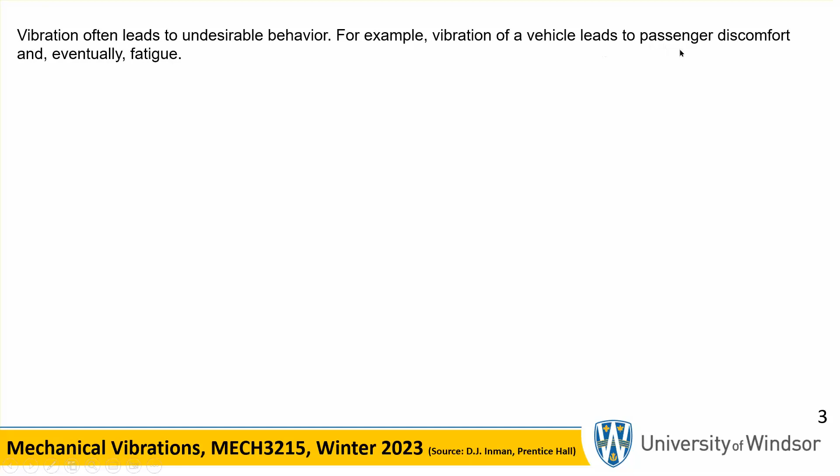But generally speaking, vibration is undesirable. For example, passenger discomfort due to fatigue in a car which is going over a bumpy road.

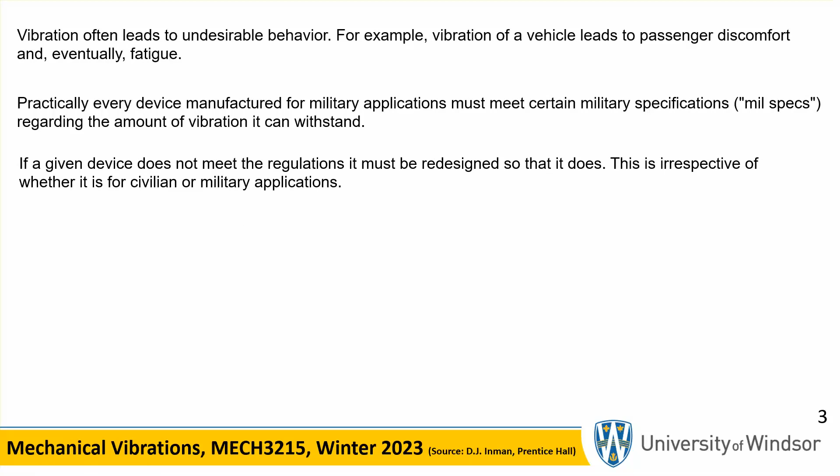Every device used for military applications must meet the mil specs, certain specifications set by the military, regarding the amount of vibration it can withstand. If a device does not meet those specifications, either mil specs or any other standards set by other organizations, it has to be redesigned, irrespective of whether it's for military or civilian applications.

Redesigning, or design in general, is not straightforward or easy, because when you design, there may be many different solutions, and depending on your needs, you have to take the one that meets your needs or is optimal. It does not have a unique solution, and it's an iterative process. This is why designing products is not as easy as it sounds.

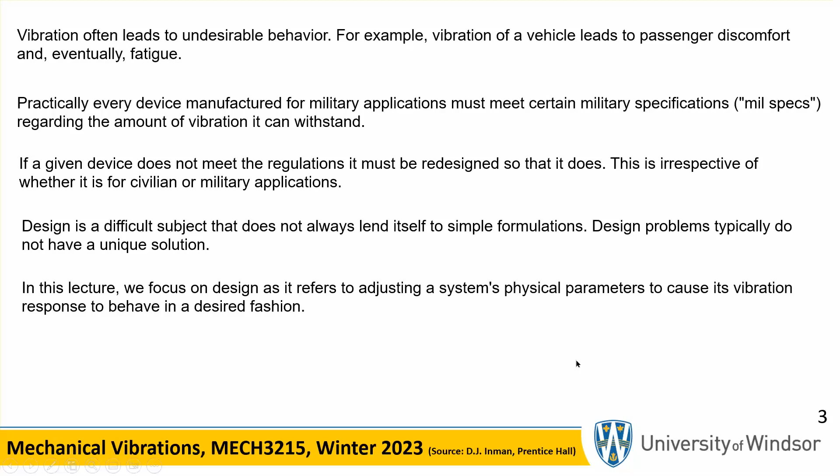In this lecture, we will focus on design when it refers to adjusting system physical parameters to cause its vibration response to behave in a very systematic and desired fashion. You must have a fairly good idea of what is desirable, what criteria your designs need to meet. This brings us to the concept of acceptable levels of vibration.

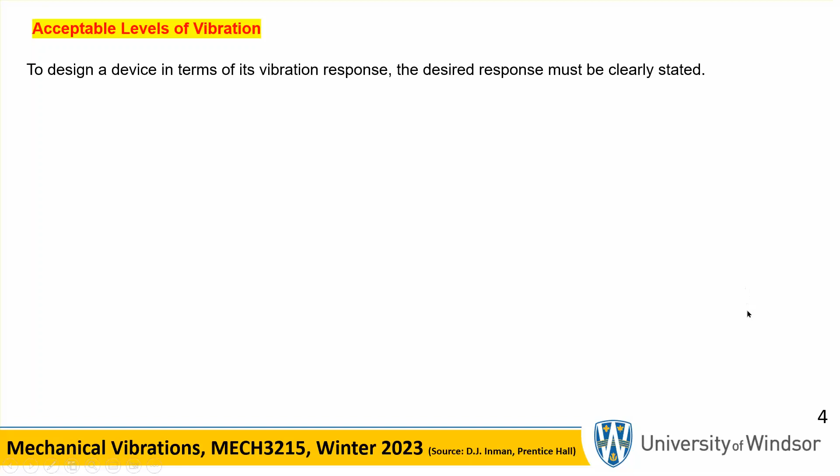To design a device in terms of its vibration response, the response must be clearly stated and defined. It cannot be a wishy-washy statement. You have to, in a very precise way, decide what needs to be achieved.

These are some specs taken from your Inman book. For different systems, the frequency ranges and displacement amplitudes differ. In the case of atomic vibration, in chemistry and material science, the frequency of vibration of atoms is of the order of 10 to the 12 hertz—a huge number. The displacement amplitude, because of the size of the atom, is extremely small, roughly 10 to the minus 7 millimeter.

For human perception, the frequency range is 1 to 8 hertz. We can perceive things as long as it's in that range, and the displacement amplitude is of the order of 10 to the minus 2 millimeters, or 0.01 millimeter, something of that order of magnitude.

For machinery, the frequency range is somewhere between 10 and 100, or 10 and 1000, for example, and the amount of displacement is of the order of millimeter to centimeter. For tall buildings or tall structures, the frequency range is between 1 and 5 hertz, and the amplitude of displacement can go as much as a meter. This gives you a ballpark figure of the range of frequency and displacement during vibration.

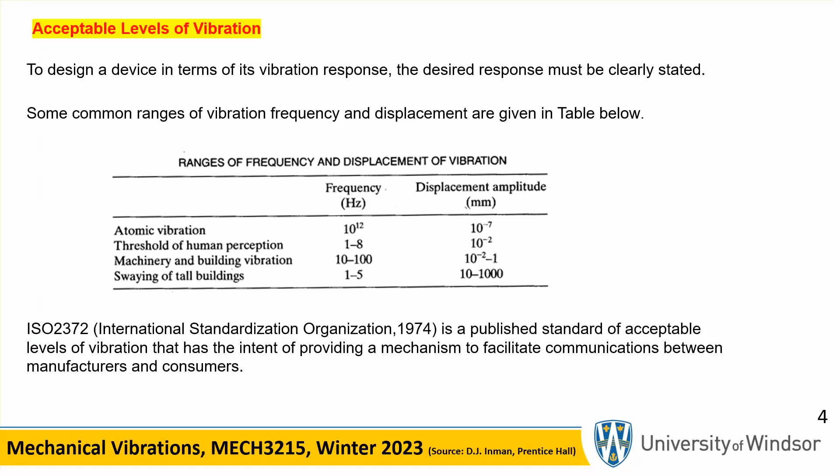Certain standards were set by ISO under the ISO 2372 designation, which we're going to look at in a few minutes. This is intended for facilitating communications between manufacturers and consumers.

Most standards are in terms of RMS values. Of course, things can also be thought of in terms of peak or maximum values, but RMS is very common, and that is what we're going to use in our examples.

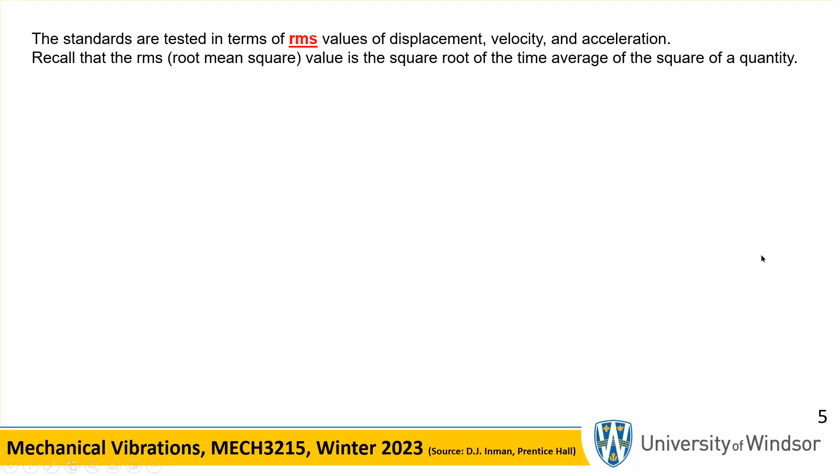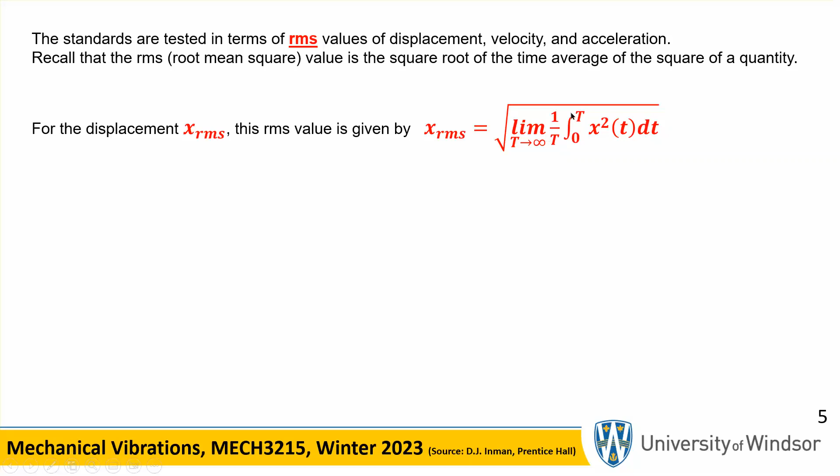Let me remind you what RMS, or X_RMS, means. If you have a signal x(t) which varies with time, and you integrate it from 0 to some big T, then average it out by dividing by T, and take T to be bigger and bigger, assuming this approaches a number, when you take the square root of it, you get X_RMS.

Now, in the case of a special signal, a harmonic signal, this is a very simple expression. You don't have to go from 0 to t as t goes to infinity. All you need to do is integrate it over a single period, where t is the period, then divide it by t, and take its square root.

We'll get that. Now, one of the important tools in vibration analysis is the concept of the nomograph, or what is called in civil engineering a tripartite plot. This is a log-log plot, and it requires some explanation of what exactly it is. First of all, it's a log-log plot. It's for a single degree of freedom and harmonic loading. So just remember, these are the limitations of the nomograph plot.

So we're dealing with a single degree of freedom system which goes through harmonic motion, and it gives you the RMS values of displacement, velocity, and acceleration as a function of frequency. Once you have one of these, you have the other two. Once you have, for example, displacement, you have velocity and acceleration. Or when you have velocity, you have the other two, displacement and acceleration.

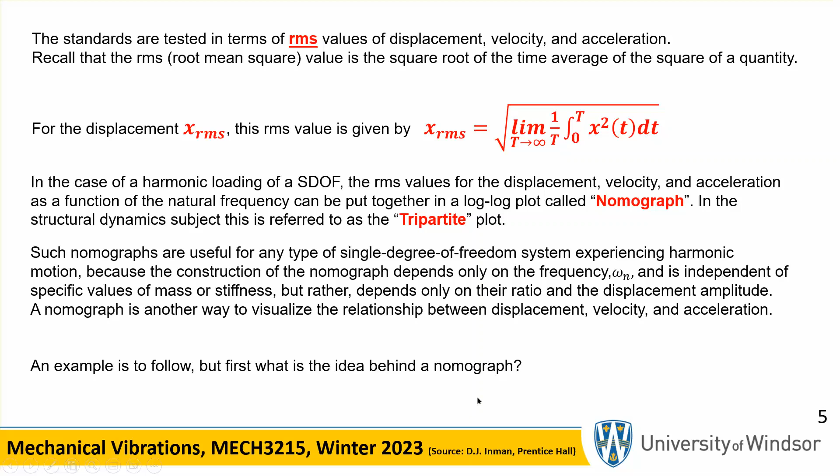So let's move on. We will see this, but it requires an explanation. It's not that straightforward, like saying here's the plot, and that's what I'm going to be doing. So what is the idea behind the nomograph?

So if you have a harmonic signal, a sinusoidal signal with frequency omega n and amplitude x, basically we have a statement on the top. That's how x is going to change with time. Now, the peak amplitude is big X.

The RMS amplitude is 0.707x. If you do that integration over one period and work it out, you see that you get 0.707x. The velocity, in other words, if I differentiate it and use that formula, you see that you get VRMS, which is the thing up there multiplied by omega n.

That doesn't surprise you, because if I was talking about peak x, x max, that'll be big X. If I differentiate this and talk about peak velocity, because when you differentiate sine you get omega n in front, it's going to be omega n times x, okay? However, we're not talking about peak value, we're talking about RMS. So whatever x RMS is, you multiply it by omega n, you get the RMS velocity.

And one more time, you differentiate this again, you get another omega n. So RMS acceleration is the velocity RMS times omega n. Or in terms of XRMS, that'll be XRMS times omega n squared. Okay, so these are obvious things.

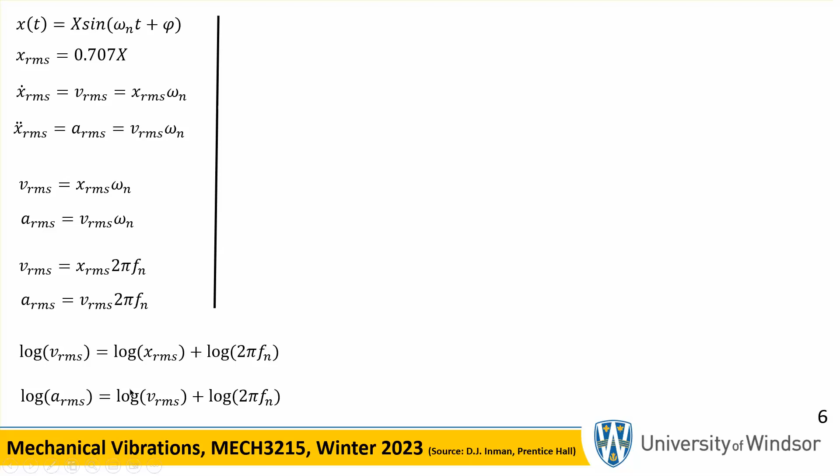Now, if I take these last two equations and take log of both sides, log of v is equal to log of x plus log of 2 pi fn. And the same thing with the second one, log of acceleration equal to log of vrms plus log of 2 pi fn. This is the property of logarithm.

And if I rearrange these, for the first equation, I just wrote it up here. The second equation, I took log v to the left side and log to the right side. I'm sorry, I took log of 2 pi fn to the left side. So there will be a coefficient of minus. Hang in there, this...

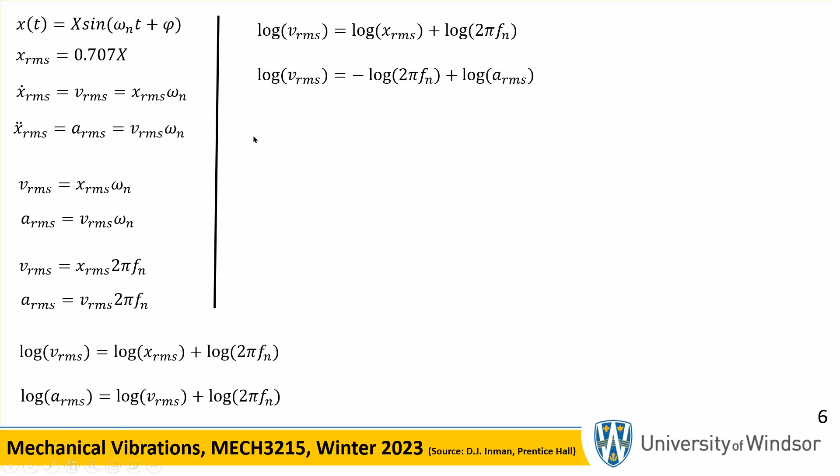Yeah, that's good, that's very good, that's exactly what I want. So I've taken this log to the left side. So we have log of v equal to negative log of 2 pi fn plus, of course, log of aRMS.

Now, if you look at this top equation, the very top equation, if you gave me xRMS, I know the first term here.

If you specified what xRMS is as a number, I know what this thing is. If I look at log of v versus log of fn, or 2 pi fn, this is a linear function. So log of v equals 1 times log of 2 pi fn plus a constant. In other words, log vrms varies linearly with log of frequency, with a slope of +1. If you gave me xRMS as a constant number and I plotted log of v versus log of fn, I left out the 2 pi because it doesn't do anything basically. You get a straight line with a slope of +1.

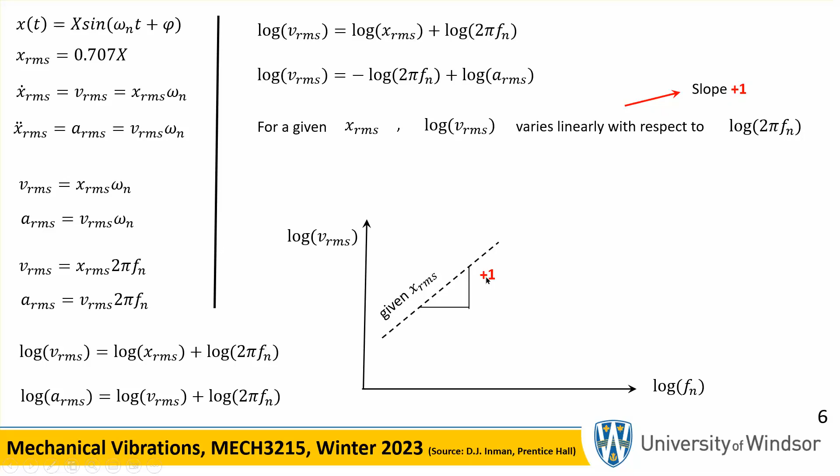And if I look at the second equation, log of velocity equals minus log of the frequency plus a constant. If you give me ARMS, the acceleration, I can say log of v equals negative log of fn plus a constant. In other words, it's a line with a slope of -1.

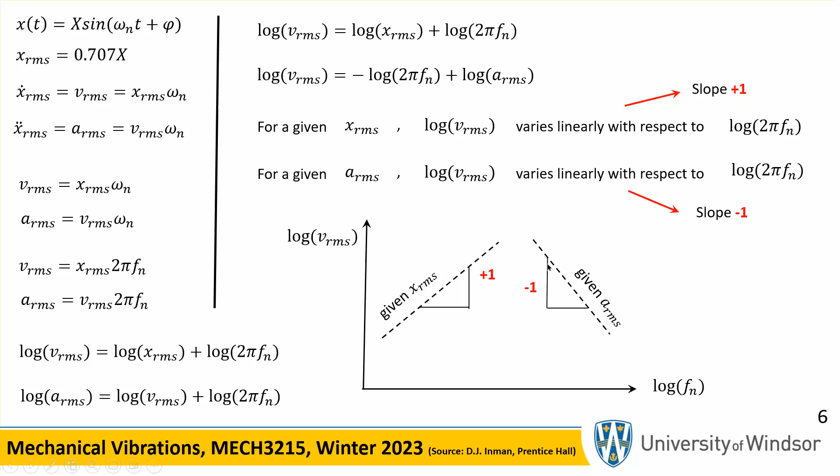So this is the idea behind that nomograph plot, and we'll see that in a minute. For a given XRMS, for a given amplitude, the variation of log of v versus log of fn is going to be a straight line at angle 45 degrees. And for a given acceleration, the plot of log of v versus log of fn is a straight line with a slope of -1. Okay, so here is a typical nomograph plot.

Remember that this horizontal axis is logarithm of fn, so it's a log plot, a logarithmic axis for frequency. This is the logarithmic axis for velocity, vrms. So log of v versus log of fn.

Notice that if you fixed a displacement, these are different levels of displacement. If you fixed one, the variation of log of v versus log of frequency is just a straight line.

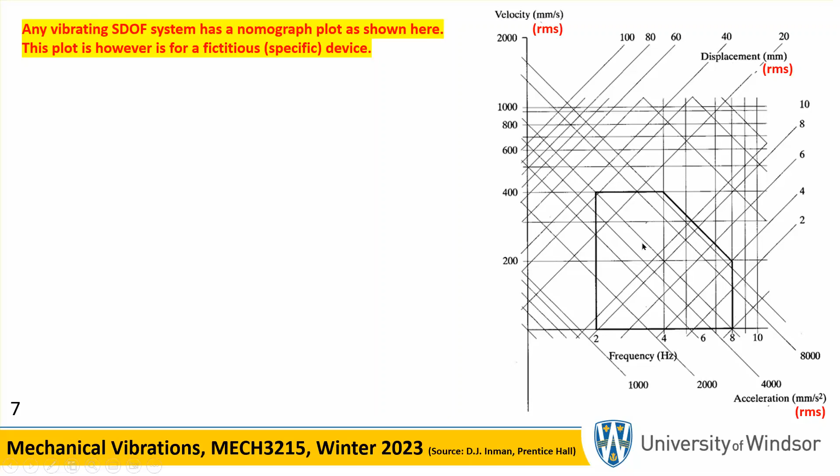These are the accelerations: 1,000, 2,000, 4,000, 8,000, etc., millimeter per second squared. If you fixed one acceleration, the variation of log of v versus log of fn is a straight line with a slope of -1. That's exactly what this thing is saying. I'm using RMS here, but as I said, everything can be in terms of peaks, for example.

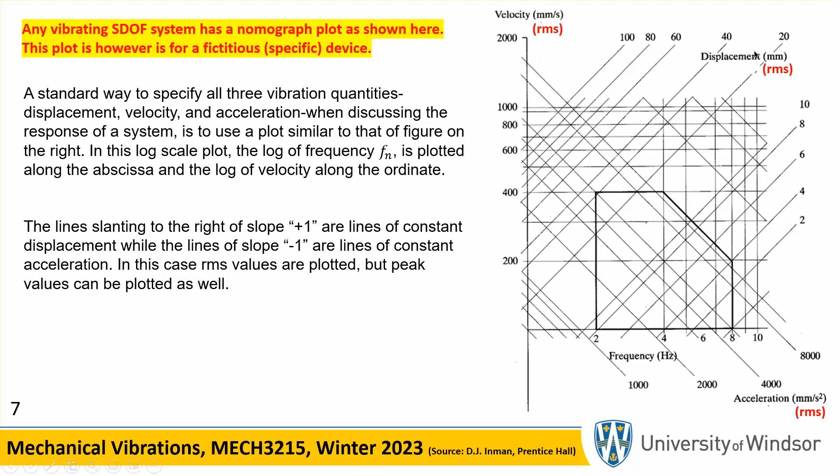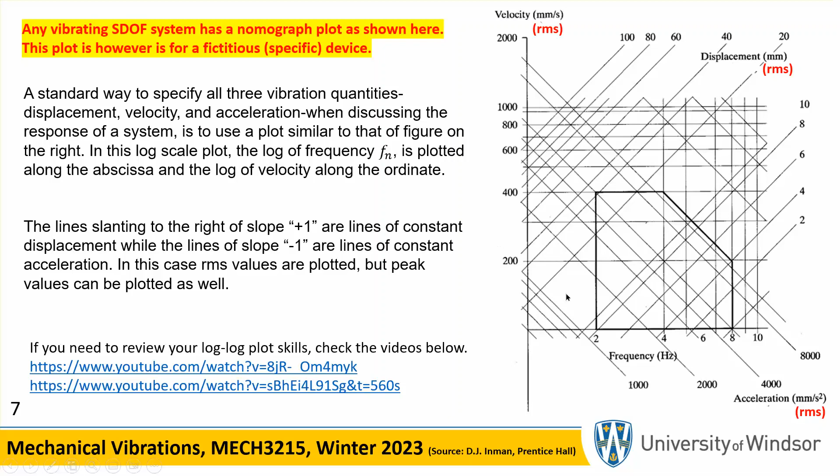Now, you may feel there is a need to review your log plots or semi-log plots. I suggest you go to a very basic tutorial. These two are pretty good, and you can review it. For us, it's just going to be eyeballing — we'll eyeball it and come up with the numbers, but there's a systematic way, and if you want, you can go to these sites.

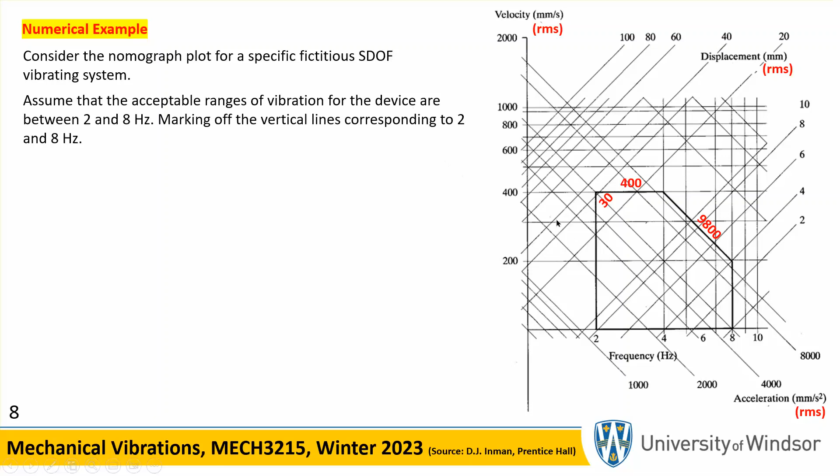Now let's look at a simple example. It says assume that an acceptable range of vibration for a device is between 2 and 8 hertz. So we know this is the line 2 hertz, this is the line 8 hertz. We know that an acceptable level of vibration for a certain device is in this range.

If the RMS desired acceleration is 9,800 millimeter per second squared in that frequency range, it means the acceleration must be below that. So look at the line — these with a slope of -1 are logs of acceleration. Find the line which corresponds to 9,800. Anything below this, to the left of it, is acceptable. So right now we are between 2 and 8 and below 9,800 millimeter per second squared.

And the RMS acceptable for velocity is 400 millimeter per second. So this horizontal line, this is 400, it limits the velocity. So you must be below 400, to the left of 9,800, and between these two vertical lines. So this is an acceptable region for that device, based on the specifications given.

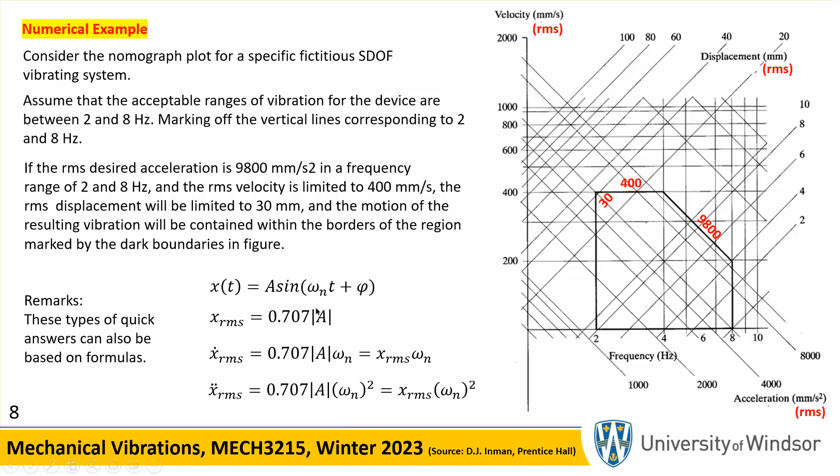Now, I wrote these things down for your reference again. We already saw that, but there I used the big X here — big X, I'm putting the A, so it doesn't matter. You have seen it already.

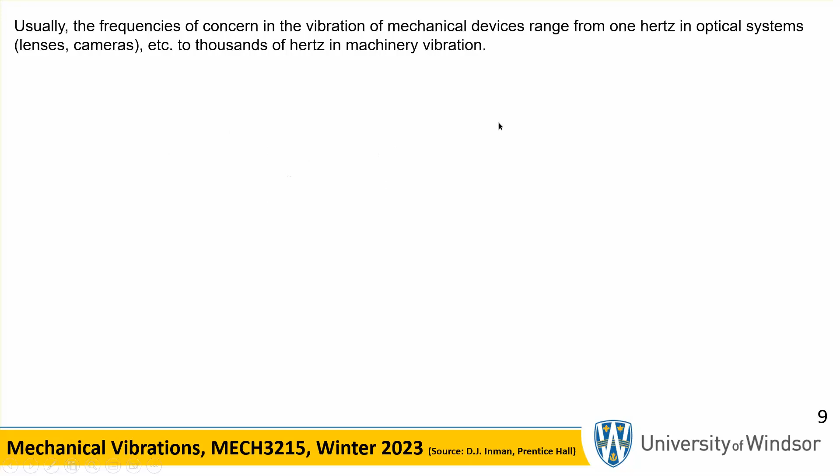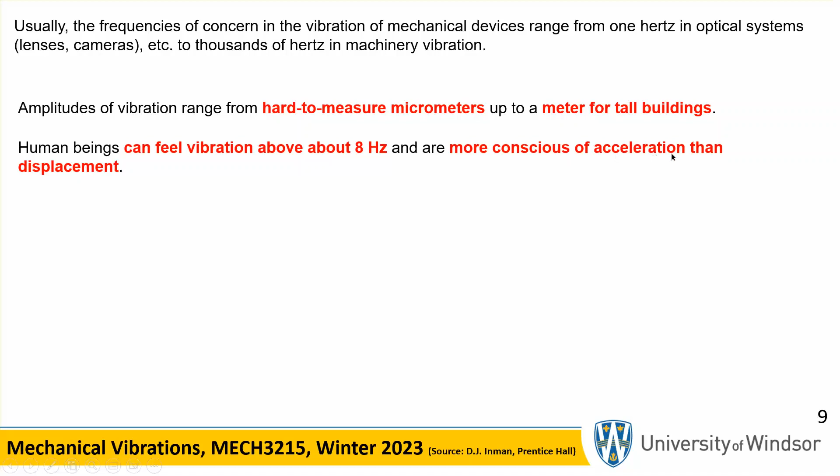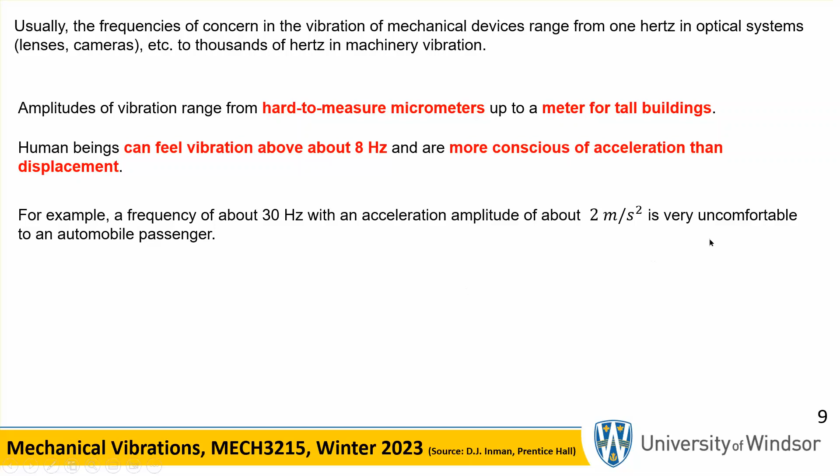We are more concerned, or more conscious of the acceleration rather than the displacement. That's the reason why a 30 hertz oscillation in a car traveling at that acceleration is actually uncomfortable. It's outside of that frequency range, and this may be okay, but outside of that frequency range at this acceleration, you may feel uncomfortable in the long term.

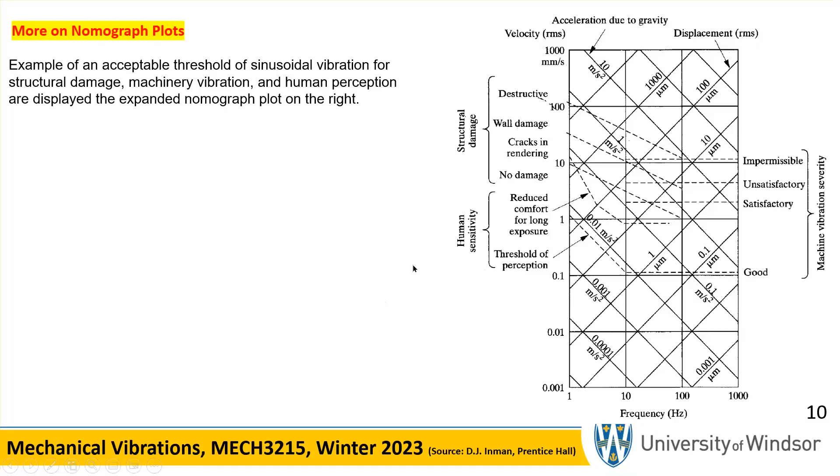So here is the same nomograph that I showed you before, except that the standards set by ISO are set here. These are the 45-degree lines; we show the displacement. These are the minus 45-degree lines, which are the acceleration. The vertical axis is the logarithm of velocity, and the horizontal axis is the logarithm of frequency. Remember, all of these are log-log plots.

Now, if you look at the ISO 2372 standard for machinery, it says that the frequency range is between 10 and 1,000. And if your velocity is between this value and this value, you're dealing with a good characteristic of the vibration of the machine. If you are between these two lines, it's satisfactory. If the velocity is between these two lines, it's unsatisfactory, and above that, it's just impermissible.

It's destructive, basically. Now, the other standard is for tall buildings, which is right here - this is ISO DP 4866. So basically, it says that if you are below this line, there's no damage to the vibration. Between these two lines, cracks in the wall appear, and between these two lines, there's a problem with wall damage, and finally, above that line is completely destructive.

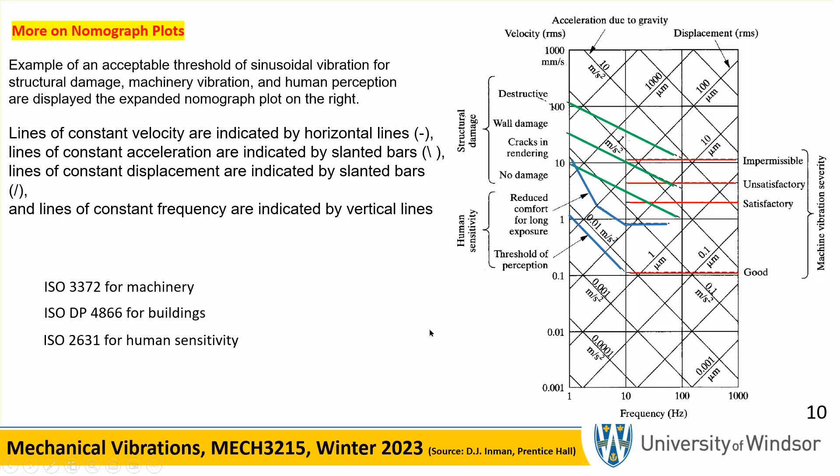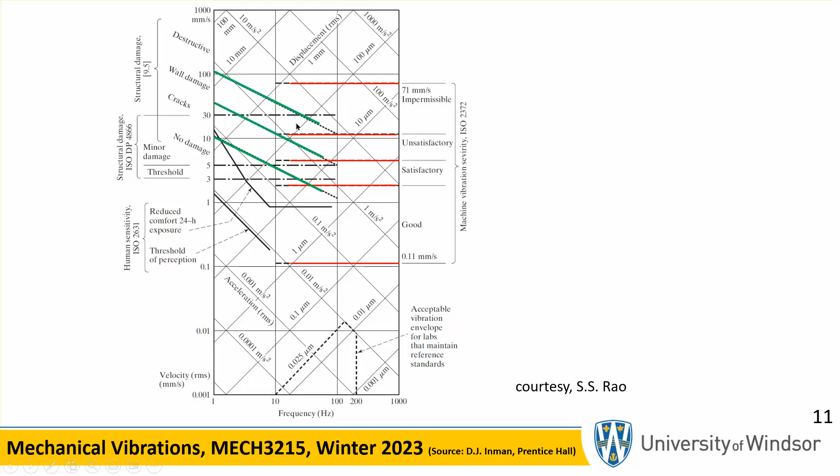Now, this same plot is reproduced here for you. The sources are different - the previous one was from Inman's book, this is from Rao's book. So it's the same kind of stuff. You can see there is the ISO 2372 standard for machinery, there is the ISO standard 4866 for buildings, right there. And finally, these two lines are for human sensitivity to vibration. So this is for machinery, that is for structures, and this is for human perception.

So let's do an example. Suppose we have a car whose mass is 1,000 kilogram and stiffness of the suspension is 400,000 Newton per meter. Now it hits a bump of 0.1 millimeter. Let's assume that this is actually the RMS amplitude - it could be the peak amplitude, but we're saying suppose it's the RMS value of displacement. So, of course, once it hits the bump, the car goes over it and starts vibrating up and down.

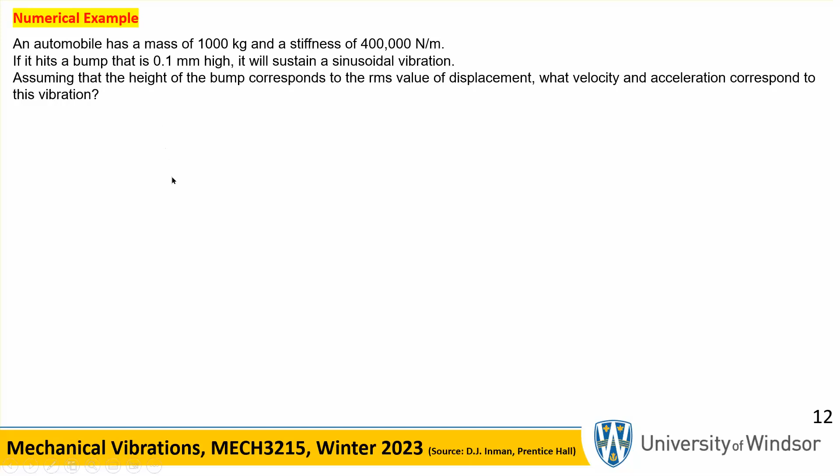It asks what velocity and acceleration corresponds to this vibration. In other words, if this is the RMS displacement, what are the RMS values for velocity and acceleration? And then the second question is, what can we do so that things get better - basically, we don't even feel the hitting of the bump and that vibration. So I'm going to do it on the next slide.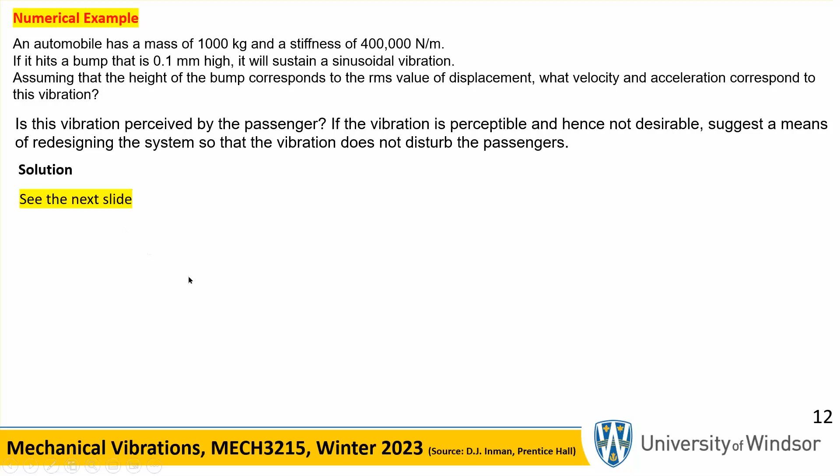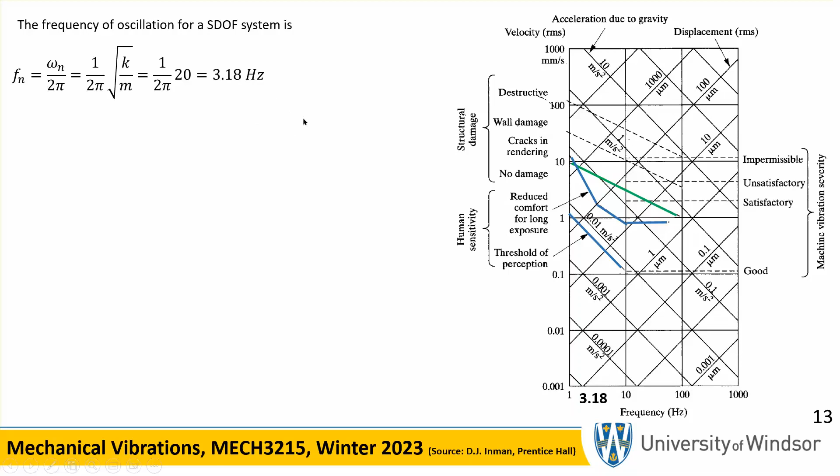Now, the RMS displacement amplitude is 0.1 millimeter, which if you convert into meters and write in terms of micrometers, it's going to be 100 micrometers. So what happens is that here is the 3.18 hertz - that's this number.

You go up, up, up until you hit that curve, given displacement. We are given the displacement of 0.1 millimeter RMS, or 100 micrometers. So that's this line, see that? This line, 100 micrometer, hits that line at this location, and this location falls actually in that range, between these two curves. So yes, it's perceivable, but in the long run it could be fatiguing.

Okay, now all of these can be found from the formulas I gave you before. If this is the RMS value multiplied by omega n, you get 2 millimeters per second. That's going to be the value of the velocity. If you go horizontally, you should be hitting 2, and it hits the line at 45 degrees, sits on that line at 45 degrees, which is this acceleration. This line, the line at 45 degrees with a negative slope, is going to be corresponding to acceleration of 0.04 meter per second squared.

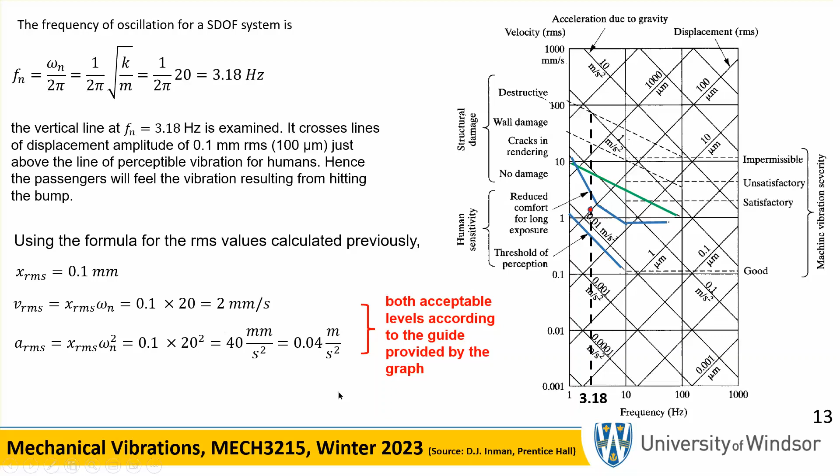But the bottom line is that you are between these two, and therefore it's reasonable, no problem. Both are within acceptable levels. Now the question becomes, what if we try to move this point of intersection to the left?

How do we move it to the left? That actually the passenger, it falls either on the line or below that blue line here. How do we do that? Because then the passenger does not even perceive, does not even feel the vibration. Okay, so there's two ways of doing it.

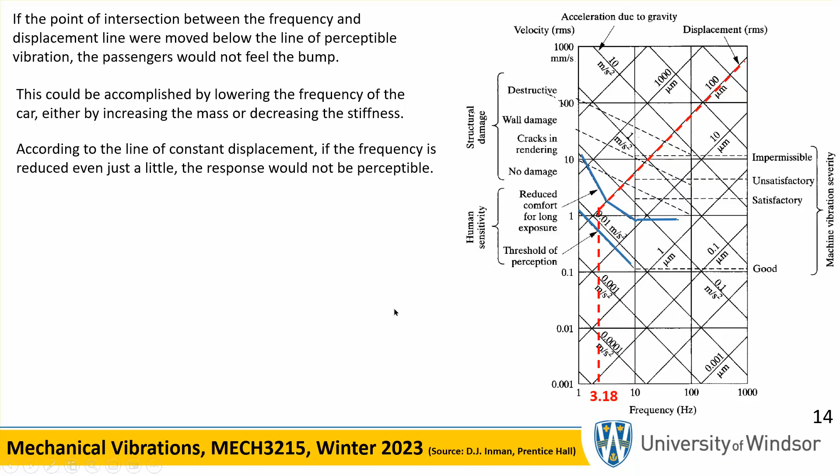Obviously you have to move this line to the left by some amount, and that can be done by changing the natural frequency. For example, I can do it by increasing the mass, because remember, natural frequency is square root of k over m. If I make m bigger, frequency becomes lower, it goes to the left. Or if I make k smaller, the frequency, same thing, shifts to the left.

So why don't we try to move it to the line at 3 hertz, right there, okay? So we want to make natural frequency 3 hertz, in other words right there at this location. So how can we do this? Well, remember that the frequency is given by this expression, okay?

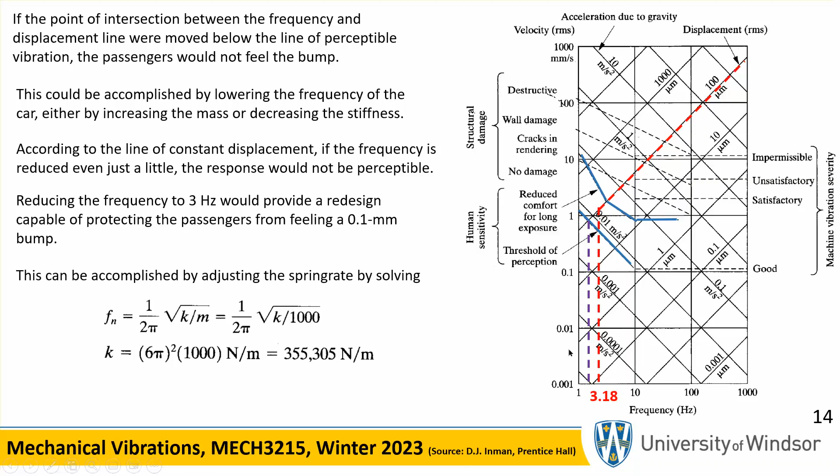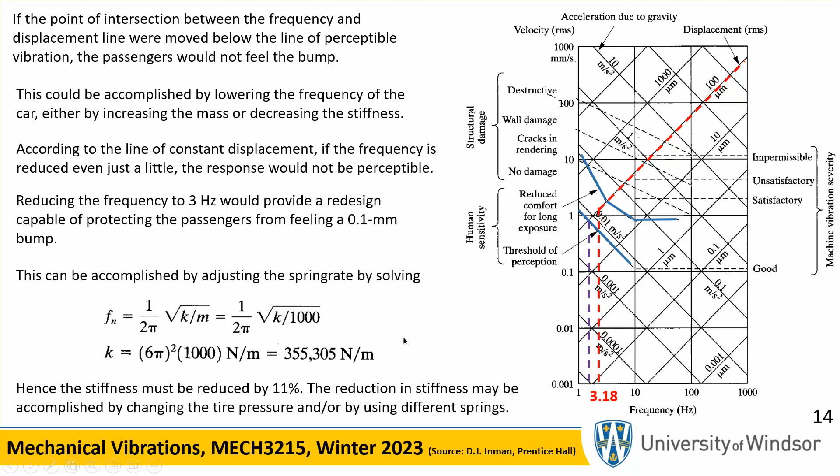Now, if the mass is fixed, and we can change the suspension stiffness, and if we want this thing to be 3, as we want it here, this is intended to be 3, that purple one, then you work it out, you get k equal to this. And so by reducing the stiffness by 11%, you come up with a benefit that once the car hits that bump, the passenger will not even perceive the oscillation.

Now the problem is that there are some issues that are overly simplistic. We made the problem overly simplistic here. For example, we assume a single degree of freedom system. A car is not a single degree of freedom system, or if you use a more refined model, such as a multi-degree of freedom system, you have more confidence.

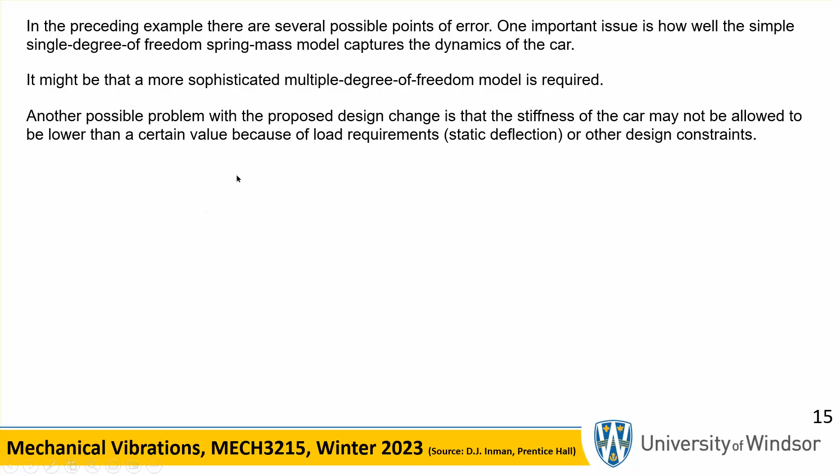The second one is that we reduce the stiffness, okay, and that was beneficial for the sensation of vibration by the passenger. But if you reduce it, if you make it out of gum, okay, then obviously it can't support its own static deflection or the weight of the car. Or you may decide to increase the mass, but that may not be possible because more mass means more fuel, etc. So that may not be feasible.

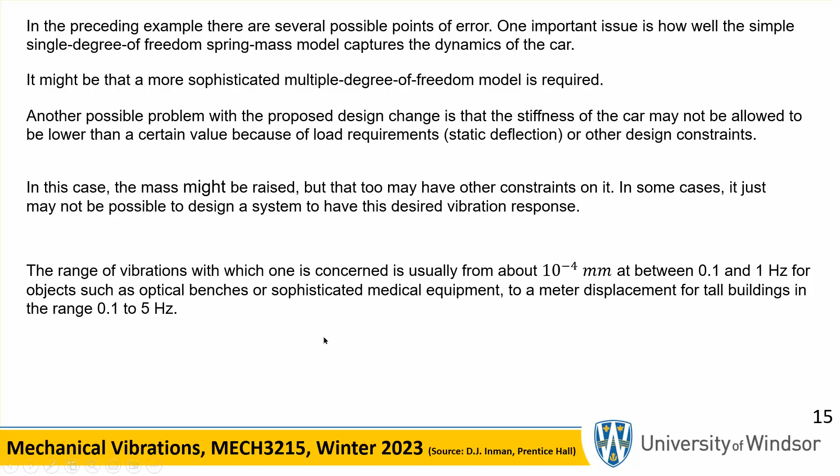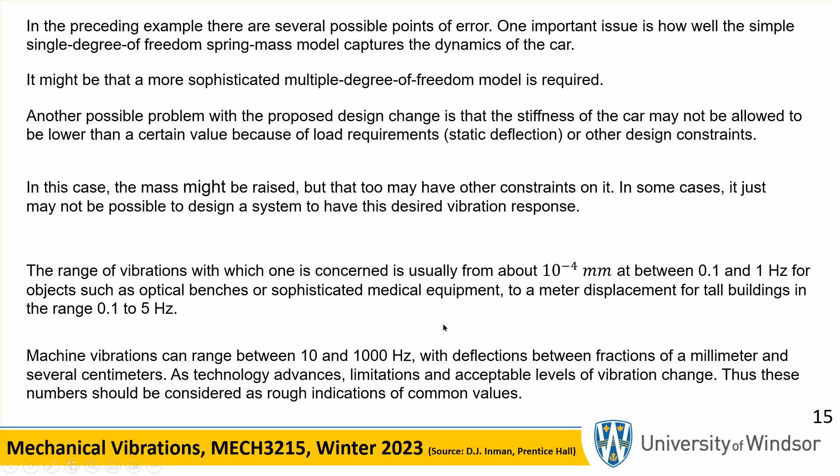Now these are the range of oscillations for the range of frequencies, and the displacement amplitude for different situations. This one is for sophisticated medical equipment. For a tall building, the range of frequency is 0.1 to 5 hertz, and the range of displacement amplitude is about 1 meter, could be as order of magnitude being 1 meter or even more. And machines go between 10 and 1000 hertz, and roughly a fraction of a millimeter to a centimeter, several centimeters, for the displacement amplitude.

Okay, now what's this business of vibration isolation? So first we covered the issue of a nomograph and using these charts to come up with a very rough, quick, acceptable, perhaps, solution based on the standards set by ISO.

Now there are different ways of controlling the vibration. One of them is to actually stop it at the source. In other words, by changing the mass or the stiffness of the structure, we change the natural frequency, and therefore, like the previous case, we moved that vertical line from 3.18 to the left.

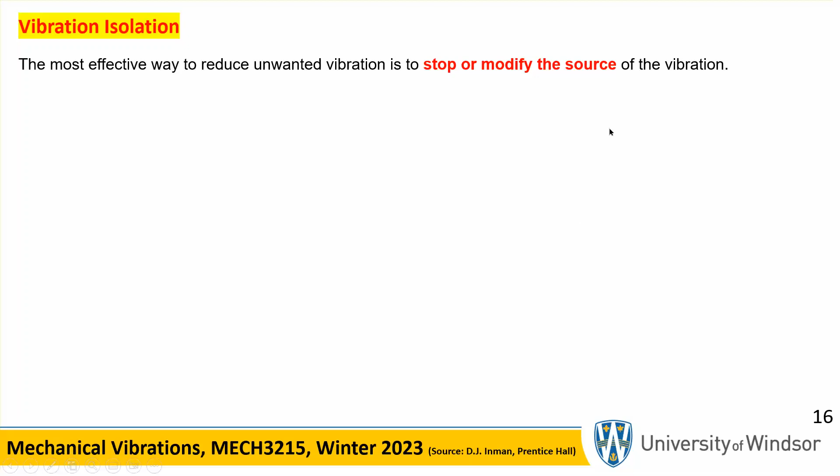Okay, so that is trying to stop it at the source. But it may be that that can't be done, like in the previous example, because the thing is already manufactured. You cannot do anything about it.

The other option is to isolate the source, usually done by changing the stiffness and damping characteristics between the machine and the ground. You put rubber pads there, or a spring, and that's one way of controlling it by isolating the machine, the source of vibration, from the foundation or ground.

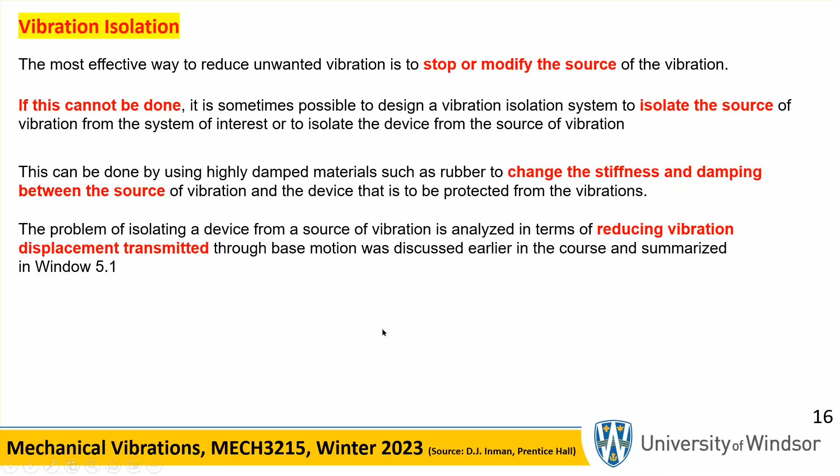This can be done both in terms of displacement transmissibility and force transmissibility. When you put these isolations in place, you either reduce the force through the foundation, or in the case of base excitation, such as a car going over a rough road, you're trying to reduce the displacement transmissibility. So it can be done either at the displacement level or the force transmissibility level.

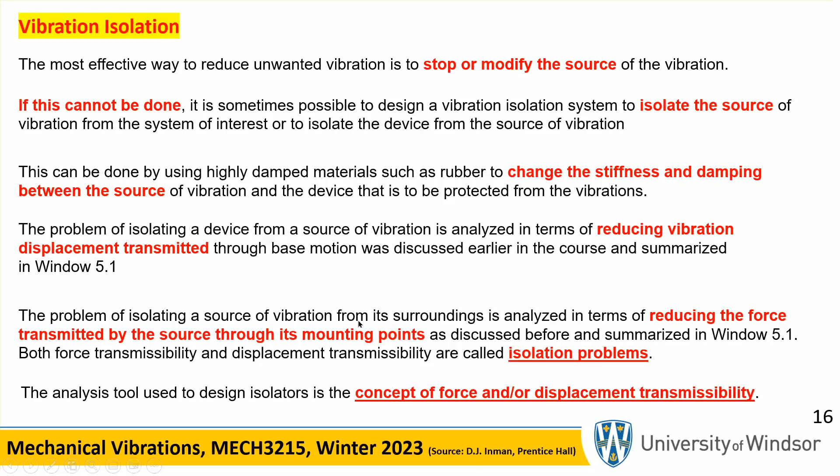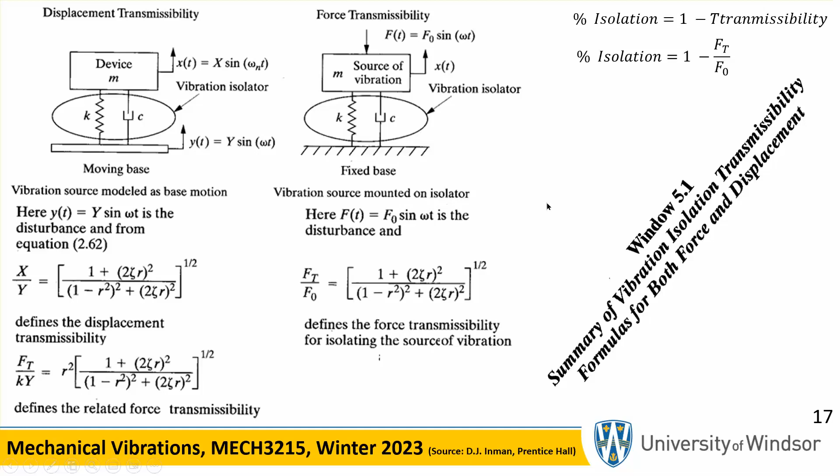We have done things like this in the first, I would say, weeks 3 to 6, something like that. We have done force transmissibility and displacement transmissibility, etc. Now, the alternative is to do a vibration absorber.

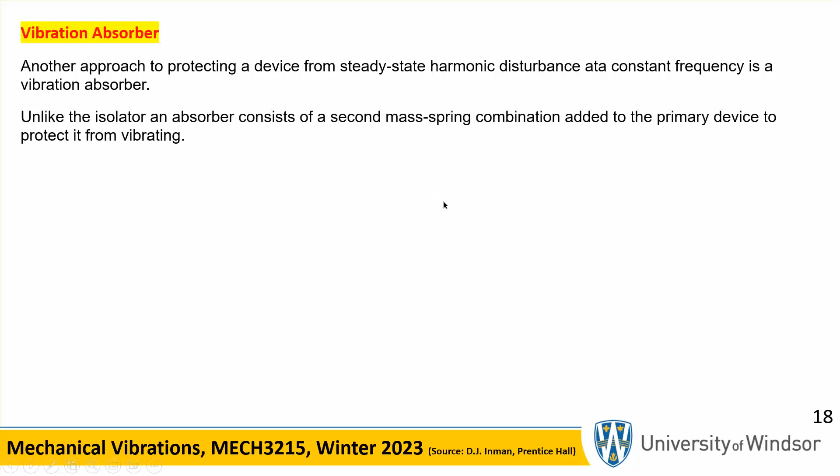This is another approach to protecting a device from steady state harmonic disturbance at a constant frequency - this is vibration absorber. Now, the difference here is that you add things to the machine. You don't introduce rubber pads and springs, but instead alter the machine somehow so that it solves the problem, alleviates the problem.

If you do this to analyze it, we may be going from a single degree of freedom into a 2 degree of freedom system, which has two natural frequencies, and obviously you have to stay away from them. We'll discuss this in the context of examples in a minute.

The whole idea is to take the machine, add to it a mass, which is connected to the original machine through a spring with some stiffness. Instead of the machine vibrating violently or largely, the machine's vibration itself is reduced or completely eliminated, but at the cost of that added mass violently vibrating.

Absorbers are often used on machines that run at constant speed, such as sanders, compactors, reciprocating tools, and electric razors.

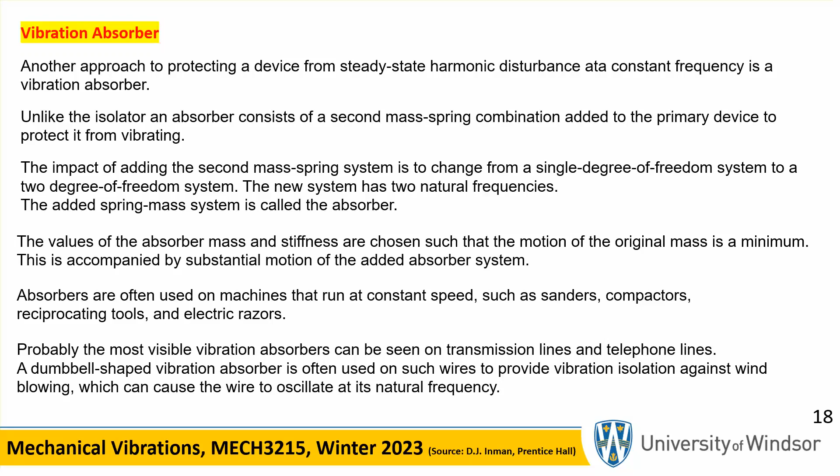The other example I gave you is that skyscraper in Taipei, where on the top 5 or 6 floors they have a gigantic ball hanging from the top. So if there's any tendency of the building to sway and vibrate, that huge steel ball on the top floor prevents that by vibrating and absorbing the potential vibration of the building itself.

So here's the situation. We have a machine here, it's got legs, and because of the nature of it - it could be an out of balance machine turning - the actual platform vibrates violently. So what you do is you add a mass connected to the machine through a spring, and now instead of a single degree of freedom model, we have a 2 degree of freedom model.

I will show you that if this mass and spring stiffness, MA and KA, are chosen carefully, then the displacement, the amplitude of M, becomes zero. But this added mass starts vibrating. We'll see that.

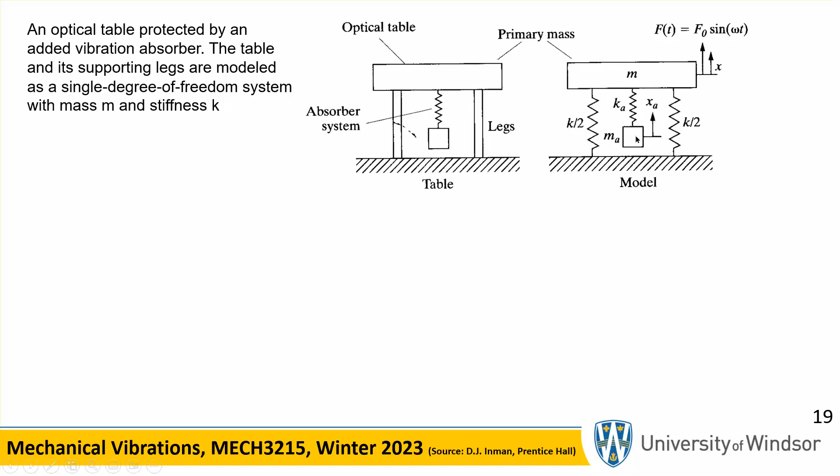First of all, the equation of motion is fairly straightforward. You should be able to do this to get this equation. It's very, very simple. For the final exam, you should be able to get equations like this based on the free body diagram and mass acceleration diagram.

The load is on mass 1. This is the mass 1, F0 sine omega t, and nothing on mass 2. So this is the equation of motion.

Now, because there is a sinusoidal force on mass 1, everything in the steady state will be vibrating at the same frequency omega as the load. Okay, this is the stuff that we did in the last 3 weeks.

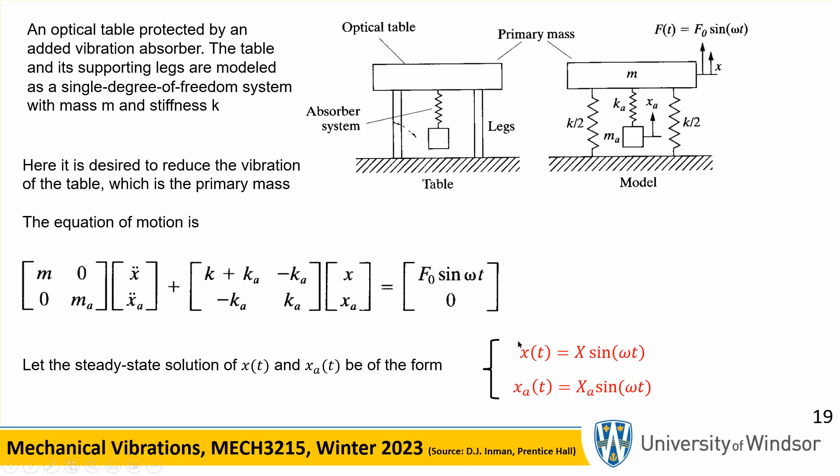So what I did, I took this and stuck it in there, differentiated this thing twice, stuck it in there. So you get sine of omega squared, you can cancel it out, and you get an algebraic equation. So actually it's this matrix times big X equal to F naught and 0. So it's an algebraic equation.

And what you do to find the amplitude of vibration of the machine and the absorber, you just multiply both sides by the inverse of that, and the inverse of this is calculated right here. So just write this thing in detail.

X is equal to this. So you take that vector, multiply it by that row, you get this thing times first component here, and you take this thing, multiply it by the second row, and clean it up, you get that. Okay, so this is the amplitude of vibration of the machine itself, and this is the amplitude of vibration of that absorber that you added later on.

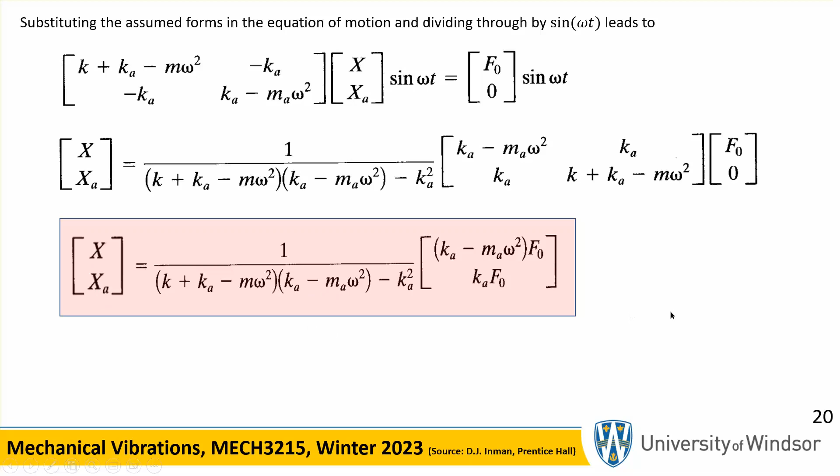We don't know what Ka and Ma are. We have to design our system for that. So this is written in detail for you in one line instead of matrix expression. You wrote it like that.

Now notice that I choose Ka and Ma because I know omega, the frequency of the driving load. If I know omega and if I choose Ka and Ma so that this is 0, big X is going to be 0. The machine will have no motion at all.

This will have motion because if this is 0, this goes away and you get F naught over Ka. So that absorber will vibrate at an amplitude, which is simply F naught over Ka, because this is 0, Ka here, they cancel each other out, this power, you get F naught over Ka.

So the moral of the story is that if you make this thing 0, which means if you choose your Ka, that spring stiffness, and the mass of the absorber and the stiffness of the absorber spring, such that it's equal to omega squared. Now remember, we know omega. Then you know that the main machine doesn't move at all, but the absorber will move.

Now, these are called the absorber parameters that satisfy this condition, for this particular frequency. That's why it's called the tuning condition. In other words, these things work when the frequency does not change.

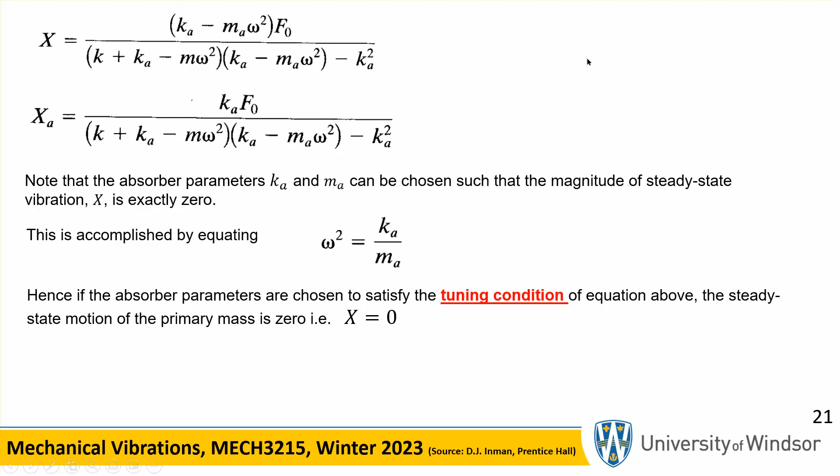If you know the frequency of your machine, of your vibration, then this absorber works because you tune it. You tune the system, select the Ka and Ma at the design stage so that it actually makes this thing 0. So it's a tuning condition which works okay for machines or vibration systems where the frequency does not change a lot, and you know what that frequency is.

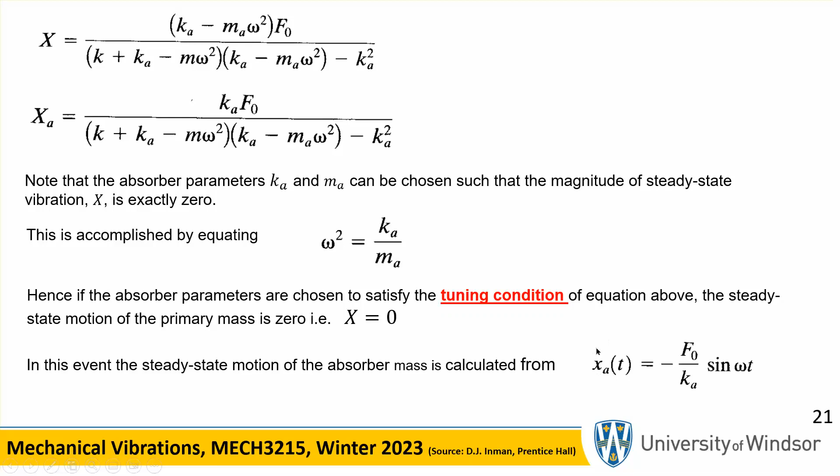Now, incidentally, I told you that if this is the case, this term, big X becomes 0, and big XA simply becomes F naught over Ka with a minus sign. So the actual motion of that absorber becomes this: the amplitude, big XA, times sine omega t.

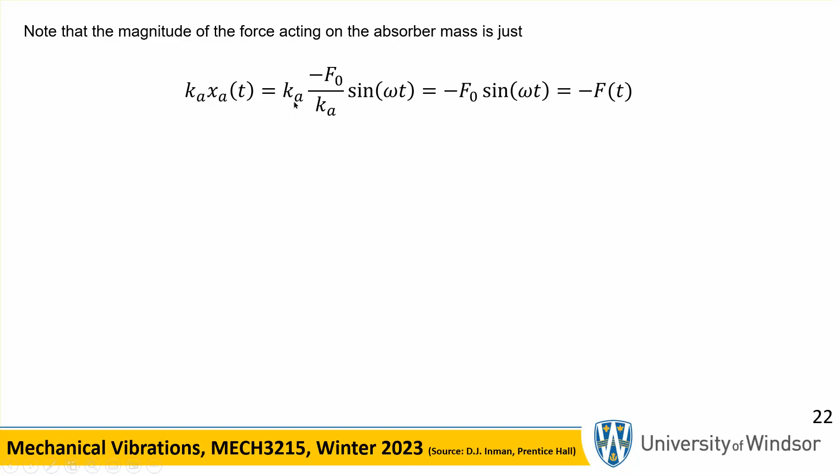Now, the other thing to notice is that if you take that displacement of the absorber and multiply it by the stiffness of the absorbing spring, you're going to see that this is equal to minus Ft. So what happens is really the applied load on the machine is nullified by the load coming from the spring, because it's minus Ft, the spring meaning the one that you hung at the bottom of the machine.

So that's why that thing does not move at all, because force on the top, Ft, force on the bottom, Ft, with a negative sign, they cancel each other out. So there's going to be a 0 net force acting on the primary mass. That machine original mass is called the primary mass.

It does not move, and the motion is absorbed by the mass. Now, the good thing is that the frequency that mass is vibrating at, the absorbing mass, is not the same as the natural frequency of the system. The natural frequency of the system is a two degree of freedom system that you actually have to work out. You'll see that the frequency is not going to be this. This is the frequency of vibration of the absorbing mass hung at the bottom of the machine, and this is not the same as the natural frequency of the system. The two natural frequencies, neither one of them, is actually equal to this in general.

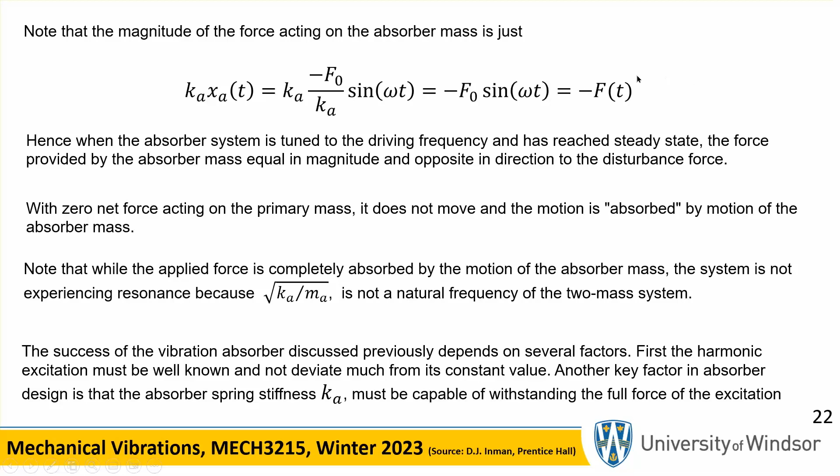So these are things one should be careful about, because if you have your frequency omega, you have a choice, the freedom to choose Ka and Ma. All you need is Ka over Ma equal to omega squared. Omega is a known value, and this becomes a design problem. How do you choose the stiffness so that it's not too soft and doesn't fall apart when the motion takes place? And how do you choose the mass so it's not too big, so that it's not bulky and can fit in a very confined area, because you don't have much space - a very tiny space that it has to fit in.

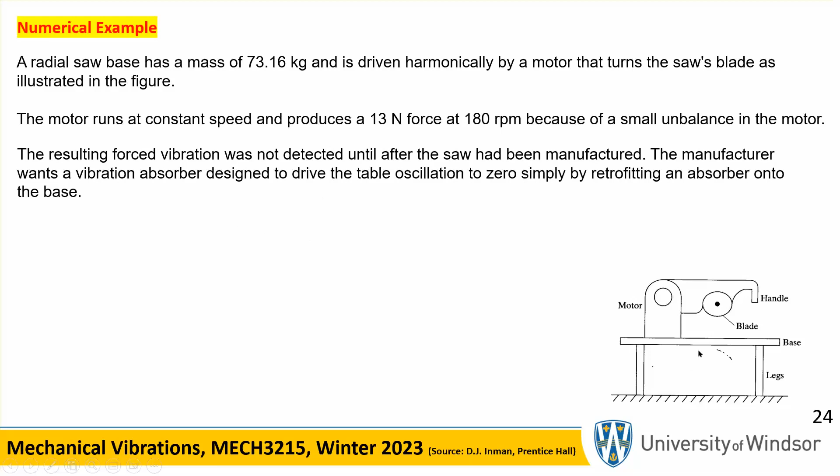Now here's an example. We have a radial saw of mass 73.16 - that's the mass of the entire machine. It has a harmonic motion because of perhaps an unbalance in the motor, and it's given at 180 RPM, that's the operating frequency of the saw, and there is a force coming from the mass imbalance. So what we need to do is design a vibration absorber, at the mass and the spring here, so that it achieves an objective.

We know the stiffness of the table legs. We need the stiffness of that absorber spring, and the maximum oscillation of the absorbing mass should not exceed this. In other words, big XA must be 0.002.

So what do we know? Mass of the machine, stiffness of the legs, F naught we know, omega, the speed RPM of the saw we know. We want the table, the actual machine, not to move, and we want the amplitude of the absorber mass to be 0.002 meter - 2 millimeter, 0.2 centimeter. So the question is: what is Ka and what is Ma?

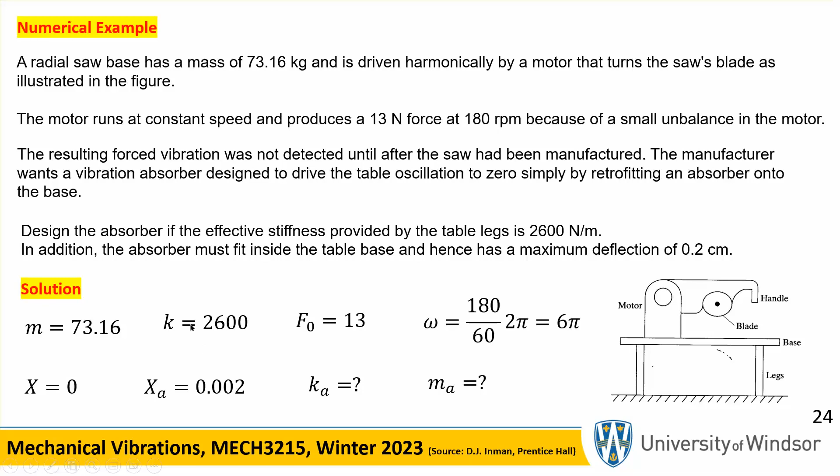Let me remind you, when we did this, we had two stiffnesses involved. I don't want to back up, but you can back up the video. When I started talking about vibration absorbers, there were two cases involved: one is for the table, for the machine, which was called K1 - that's really your K1 - and the other one is for the absorber, which is K2, and we decided to call it Ka. So this is for the legs of the table on the machine, and this is for that spring we are trying to design.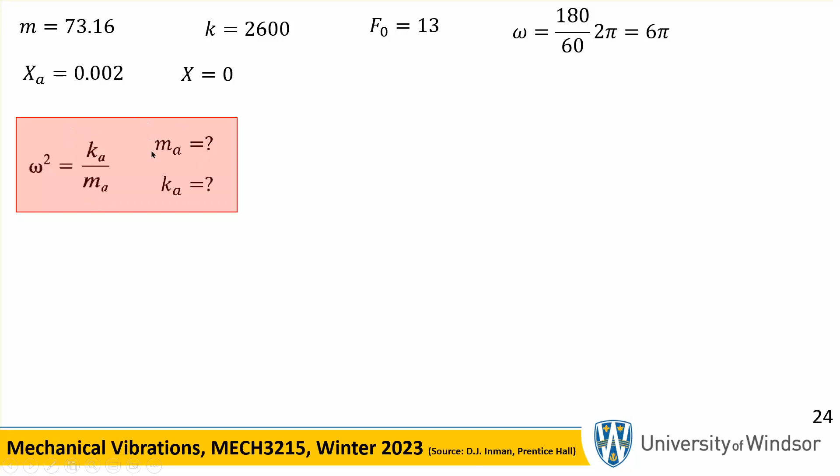Omega squared is Ka over Ma. This is the tuning condition. We don't know what these things are. So the amplitude of the absorber mass is right here - this is the motion of the absorber mass, and we know that this XA is the same. That is what XA is, and we are told XA is 0.002, so this equals 13 over Ka, which gives us Ka equal to 6,500 Newton per meter.

Now, if you go back to this equation right there, we found Ka, and we know omega to be 6 pi. You plug it in, and you're going to get your absorber mass.